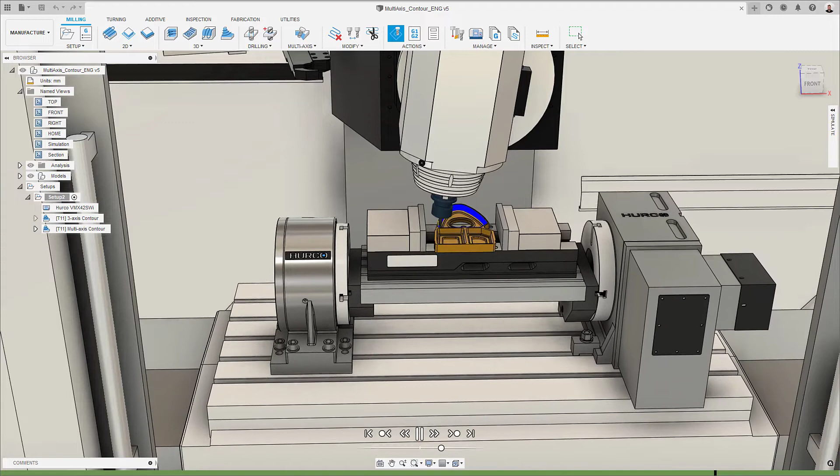When machining complex parts, minimizing the number of setups needed to complete the manufacturing process can be key to reducing cycle times whilst maintaining a high-quality surface finish. 5-axis machines can make this easier, so it is essential that you're able to produce reliable toolpaths that use your machine tool's capabilities to its fullest. To help with this, Fusion 360 has a variety of multi-axis toolpath strategies.

In this example, we'll be looking at how the multi-axis option within the contour toolpath can help minimize the number of setups needed to finish this part, which, as you can see from the Accessibility Analysis tool, contains some undercut regions. Parts like this would be impossible to fully machine with a straight-sided tool in a 3-axis configuration. However, this problem can be overcome by using the multi-axis tilting option.

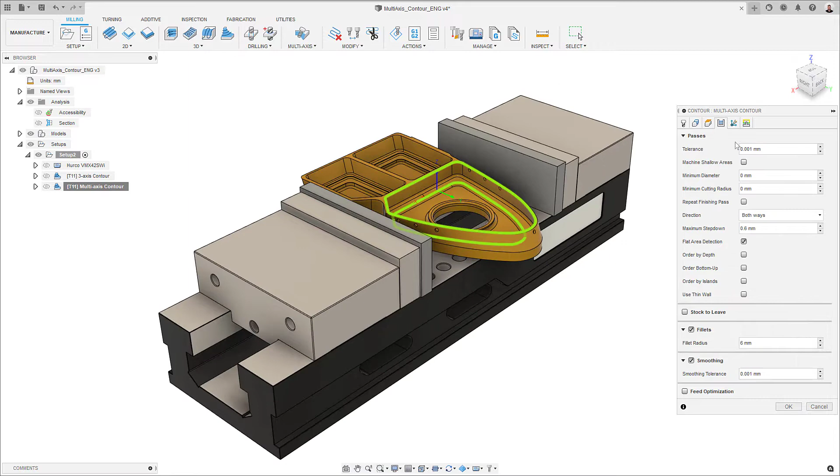First, notice that in the Tool tab, the shaft and holder option has been ticked, with shaft and holder clearance distances set to 1 and 3 mm respectively. Once the correct geometry we wish to machine has been selected, and the desired cutting parameters are set, we can move to the Tool Axis tab, switch on the multi-axis tilting option, and then set the maximum tilt, maximum segment length, and maximum tool axis sweep values.

Once calculated, we can view the generated toolpath that will machine our part, capturing the undercut regions of our pocket. Observing the simulation, we can see how the tool begins in a vertical 3-axis configuration to machine the top area of the selected pocket, to then start tilting to avoid any potential collisions between the tool assembly and the component, as the toolpath passes move down towards the bottom of the selected geometry.

With a wide range of multi-axis toolpaths available, Fusion 360 can help you maximize the output of your 5-axis machines, maintaining a high-level surface finish and minimizing cycle times.